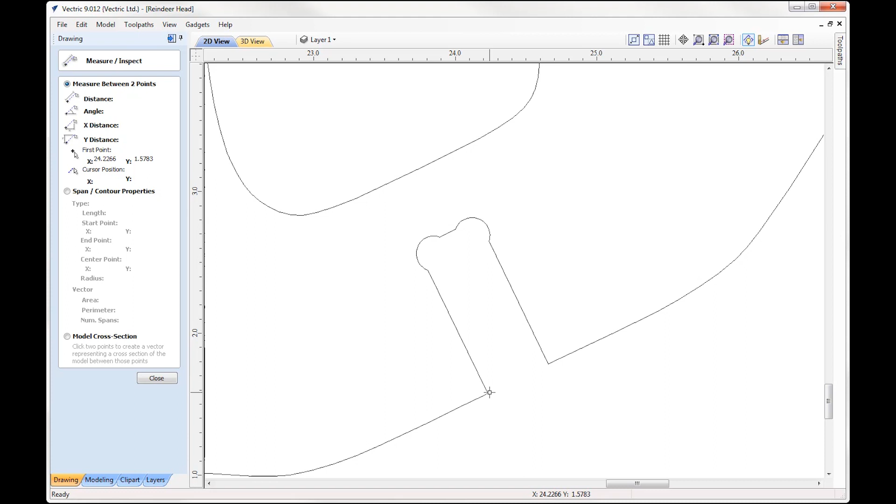If you're using a different thickness in material, then you must ensure that you alter all of the slot widths to accommodate that of the material thickness that you plan to use. So if we just measure this area here from end to end, you can see I have a distance of 0.475, which matches that of my material thickness. So make sure you alter the slots if you're working with different material.

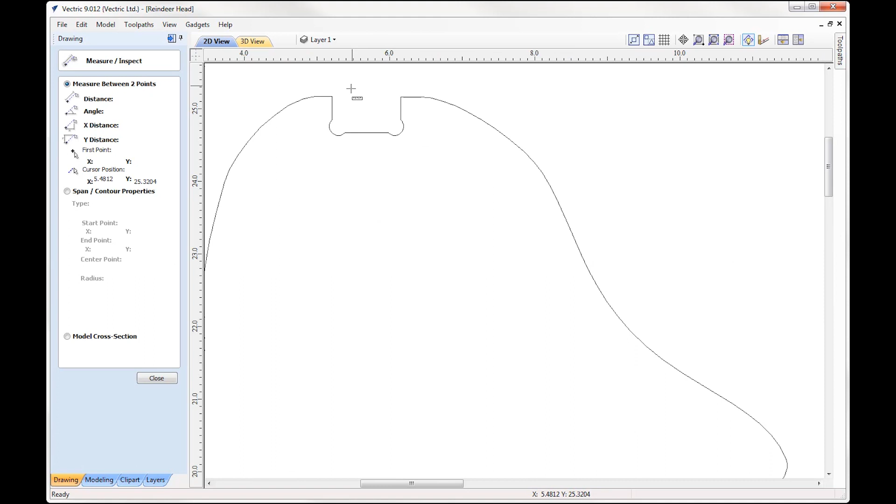Not only that, you also want to alter the fillets according to the radius of the tool that you plan to use. So how does the part fit together? Okay, so the antlers and the ears are going to slot into the head at the top there. So you'll notice that the slot for the head is actually double our material thickness, 0.95, because we're using 2 pieces that are going to slot in there.

And then the bottom of the neck of our reindeer head is actually going to slot into this slot here, which sits within the actual deer mount shield itself. You can see I've included some circles here on the actual mount itself, and these circles are in place for the washers just to provide extra support to pull the deer into the mount, as the deer will ultimately be very top heavy.

And then at the bottom left hand corner here we've got my test pieces, and as always with any slot together project you need to create some test slots to check the fit of the material within the slots themselves, and this little bit of extra cutout time will ultimately save us time and material in the long run, because we'll be able to get a correct match-up between the various allowances that will apply to each of these slots. Once we know which slot fits best, then we can apply that to our final part and just cut that out with no problems.

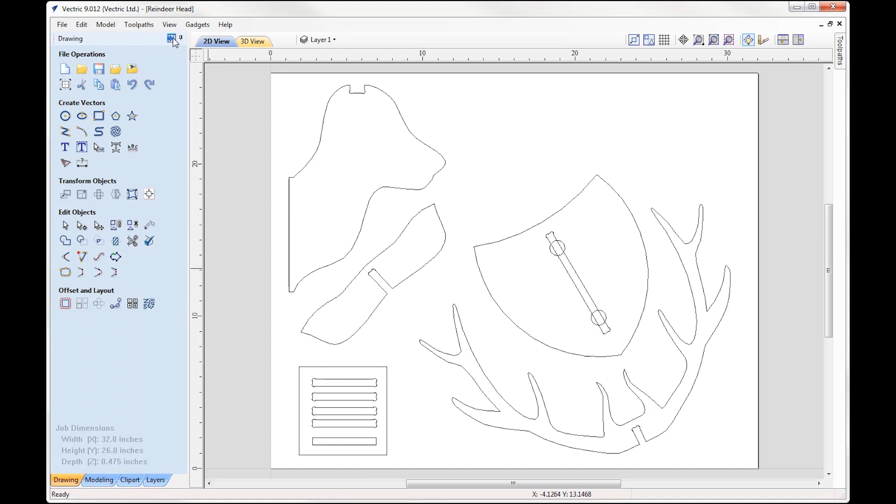So let's go and look at the toolpath. So I'll switch over to the toolpaths tab. So the first 5 toolpaths are all to do with our test pieces. So let's take a look at the first one as an example. So we'll just switch the visibility of that toolpath on. I'm also going to put the solid preview on, and we'll just zoom in on our test block there.

Okay, so if we double click to go in there, so we're just pocketing these slots out, and with each one of these I have a piece, a rectangle, that should sit within each one of those slots, and we're just ultimately checking for the perfect fit with each one of these slot holes to ensure that we have a real nice fit for our final part.

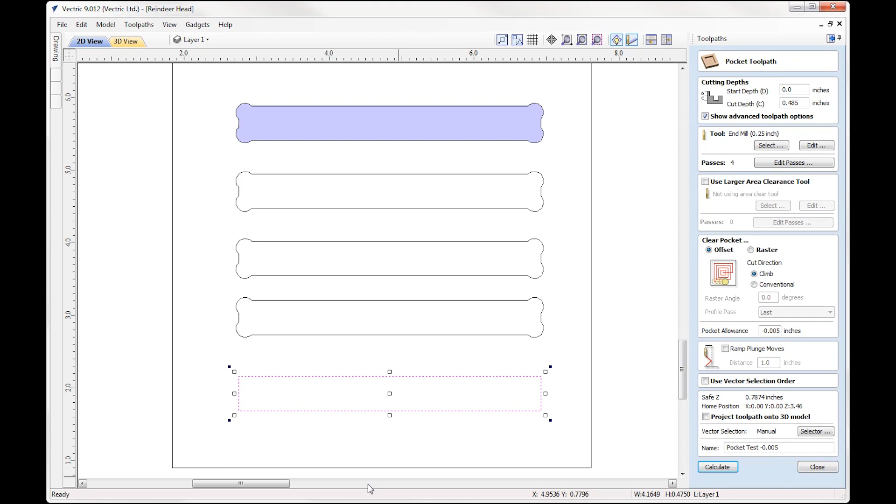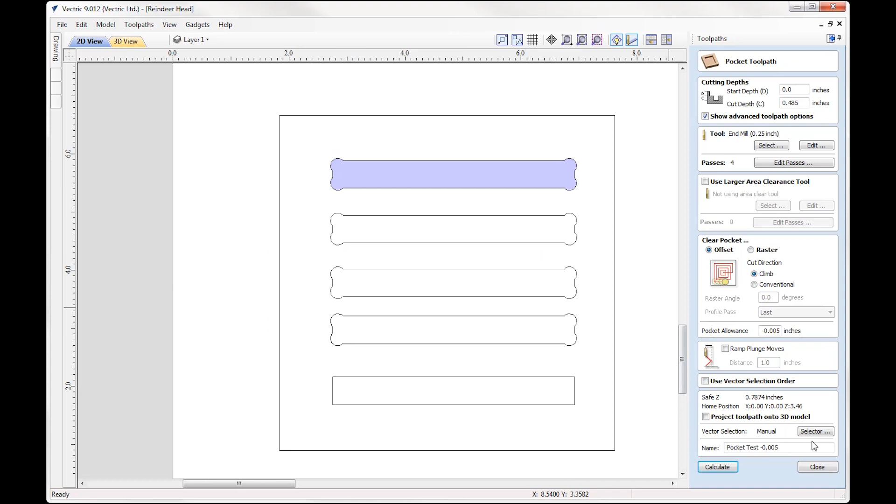So the first one that we've got here, we've got pocket allowance of -0.005, so we're just overcutting past the vector by that amount. So you can see anything that's purple is what will be cut away, and you can see it's overcutting the original vector there.

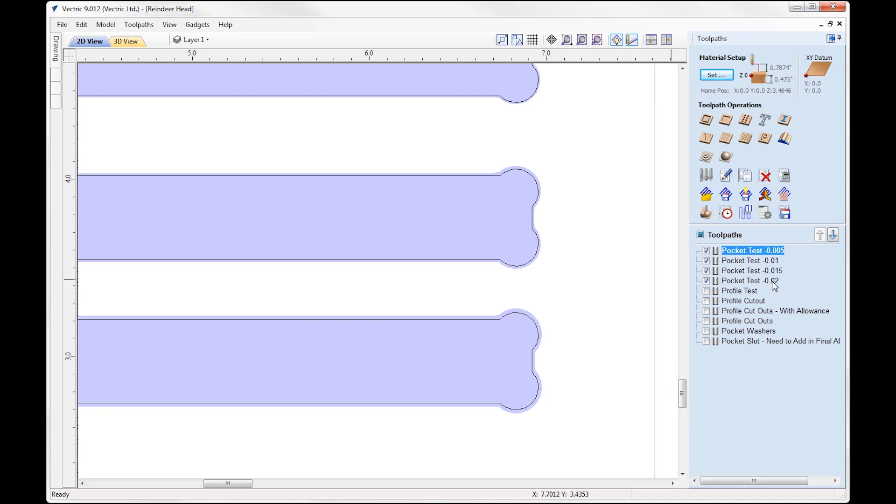Okay, if we take a look at pocket test 01 over here, so -0.01, and if we just zoom in there you can see we're just overcutting that a little bit more than what we did previously. And then for the 0.015 it's a little bit more, and then for the last one we've got 0.02, so you can see how we're just stepping that up each time.

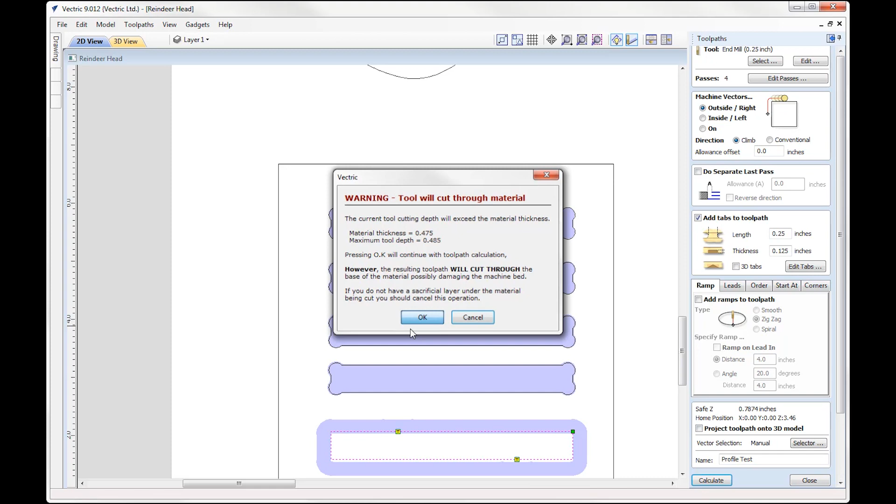Profile test, so that's to actually cut that out. Okay, so because I've moved that vector, let's just put that back in position somewhere around there, or we could just simply go ahead and double click on that just to recalculate that. So we're just cutting all the way through. We'll just tile the windows, and then again we'll just go ahead and look at that area.

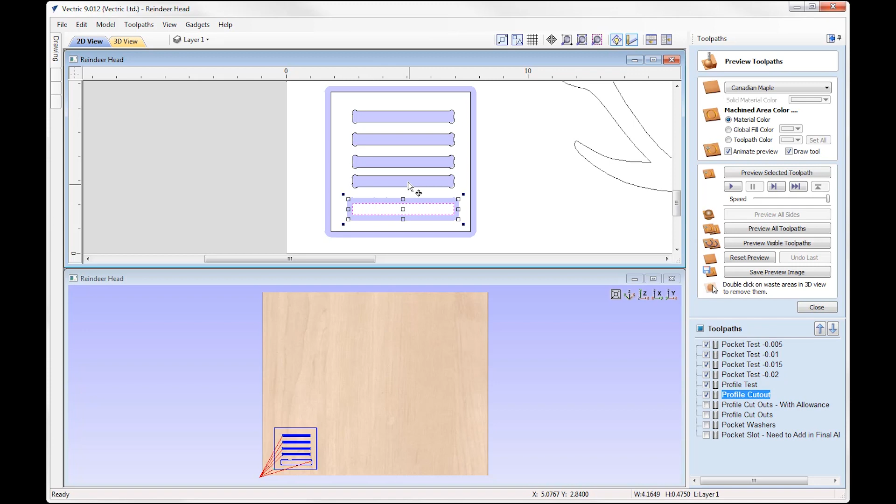So this is our part being cut out there, and once we've got that cut out, we're then just going to apply a cutout for this area, so we can take that off our machine bed, de-tab our test piece that we can then insert into each one of these slots to check which slot has the best fit for when we come to machine the overall part out.

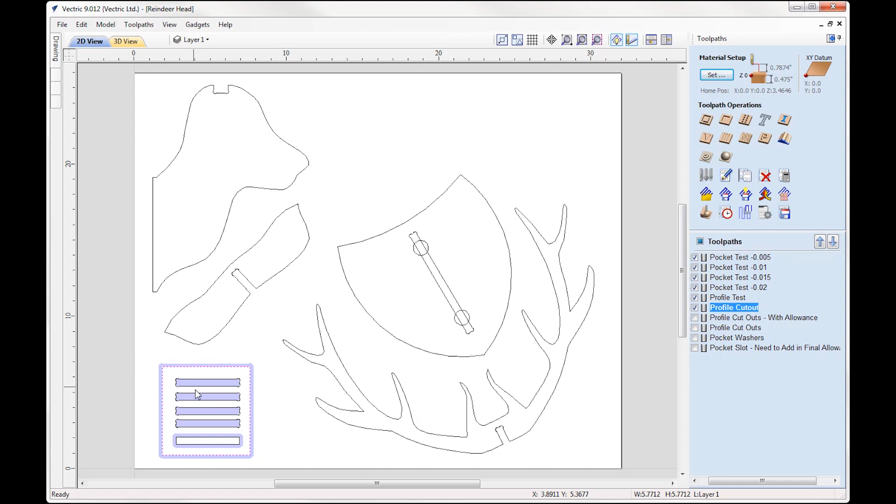So let's just maximise the 2D view, press F just to fit that to screen. We're just going to come out of the toolpath preview. And so once we know which allowance fit best, then we can apply that to our other cutouts. So we've got profile cutouts here, so this is for the antlers and for the ears.

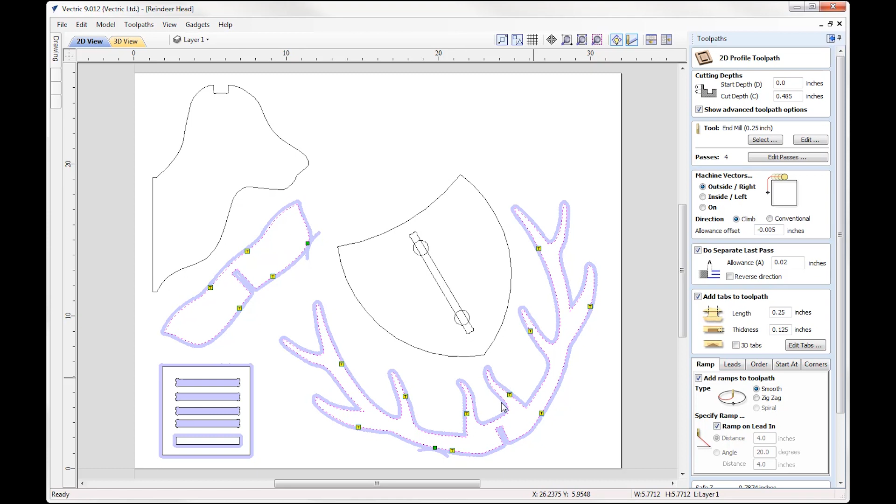So in here we've got an allowance, so if we go in there, it turned out that negative 0.005 is what fit best to go onto our deer head. Okay, so just alter this according to the slot that fit best. Okay, we'll just close out of there. So you see I added tabs to all of the antlers and the ears where I felt was appropriate, just to ensure that it was held securely to my material block.

Then we did some more profile cutouts. So here I've applied a cutout to the deer mount and the deer head. So this one has no form of negative allowance here.

We don't need to apply allowance. We only need to apply the allowance to the slotting together parts, which is just the ears and the antlers. So again, I've added tabs to this, along with some ramps and leads, just to bring that tool in.

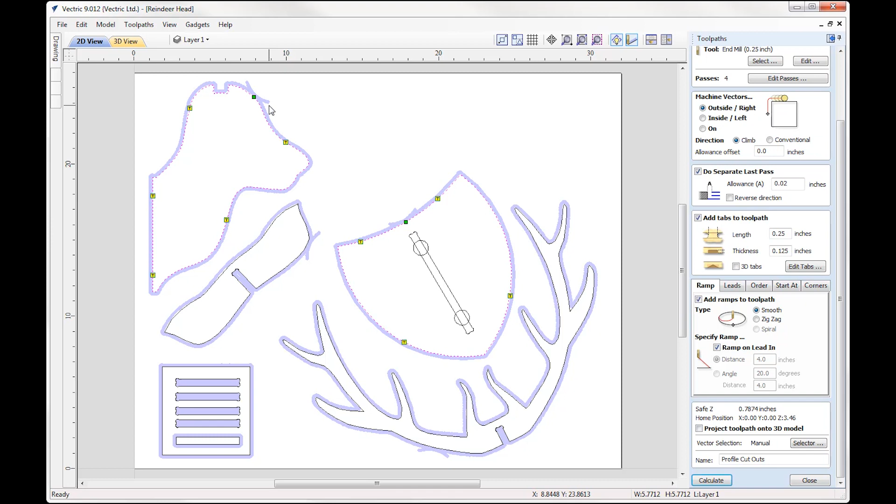Because I am using a compression cutter, we're just keeping that upward part of the tool away from the top surface, so bringing it down to a depth that ensures that we're going to be cutting down when we come close to the actual edge of the vector. Let's close out of there.

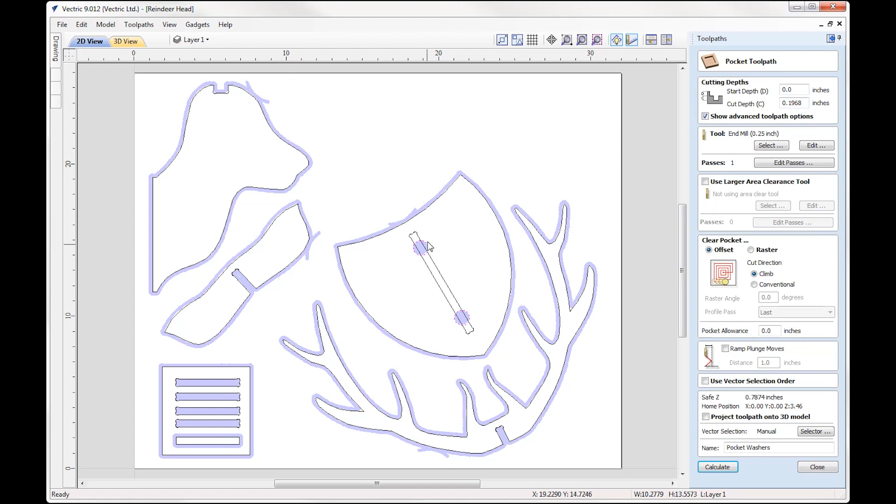So then I have my pocket for my washer. So if we just double click in there, cutting down partially into the material to put my washers within that pocket. So if we just tile our windows, and if we just begin to preview all the visible toolpaths, see how the part looks so far.

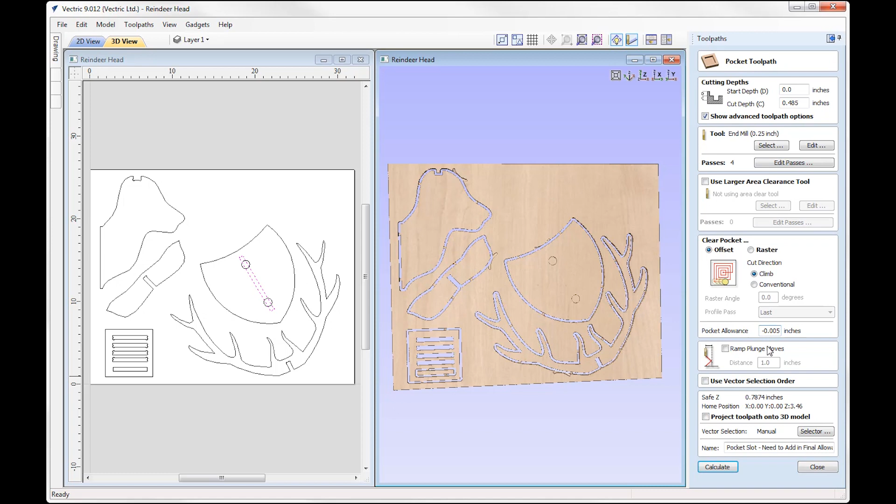You can see I've got my pockets there, and then for the final toolpath, that is our slot that's going to go through the center of our mount. And again, we need to add in that allowance that we were happy with. So in there, you just want to alter the pocket allowance. You can see I've entered that negative 0.005 in there, and then we can calculate that.

I'm going to cut through the material, that's okay, and then we'll just preview that toolpath, and this will be our finished part that we can then de-tab and then look at assembling.

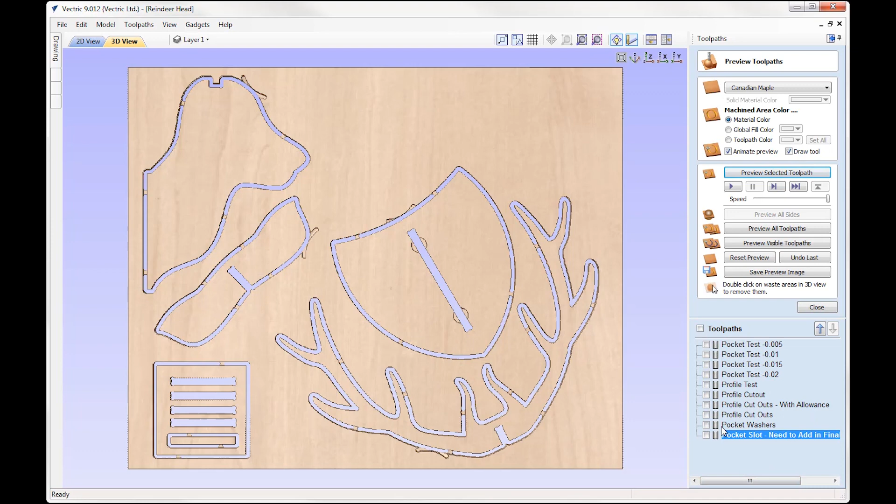So important things to remember here is you need to alter the slot width according to the material thickness that you're using, and with that you want to make sure that you alter the fillet radius according to the tool that you're using, and I'm using a 1/4 inch end mill for all of my toolpaths.

So with any slot together project, we must always do our test cut. So I've cut the test part of the file out. I've got my rectangle here, so this is going to represent anything that's going to slot into one of the slots, and then I have a series of slots here like you saw in the software.

So we've got negative 0.005, we've got negative 0.01, and then we're going up to negative 0.015, followed by negative 0.02. So it's always best to start with the larger allowance first and then work your way to the tightest fit. So I've got my part side on, and you can see straight away that is just sliding through there. So that's going to be pretty useless to us.

So let's try the negative 0.015. Again, that is just sliding through there, not very practical. Let's try negative 0.01. Okay, so here it's not too bad. That's a nice fit, however it is a little bit loose. You can see that jiggling around in there.

So let's go to our trusty negative 0.005 to see how that fits. And you can see we've got a real nice tight fit in there. Struggling just to push it out, but it does come out. So we're going to go and alter the file so that all of our profile passes have that allowance of negative 0.005.

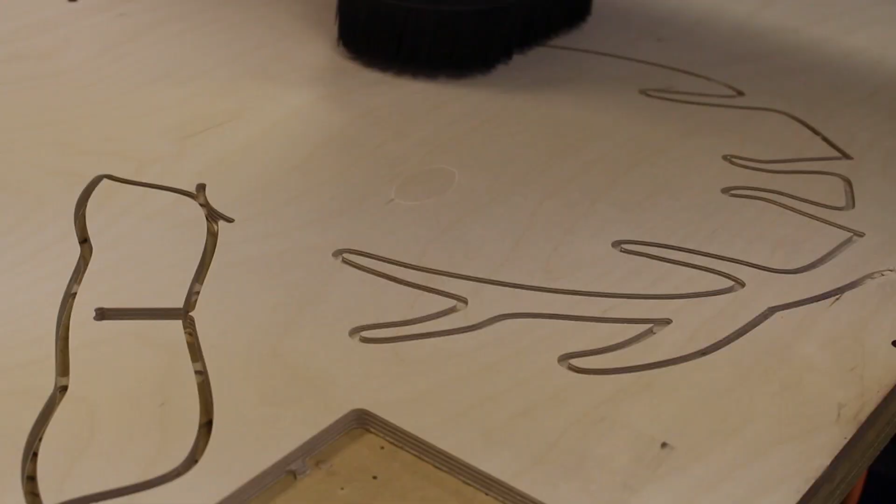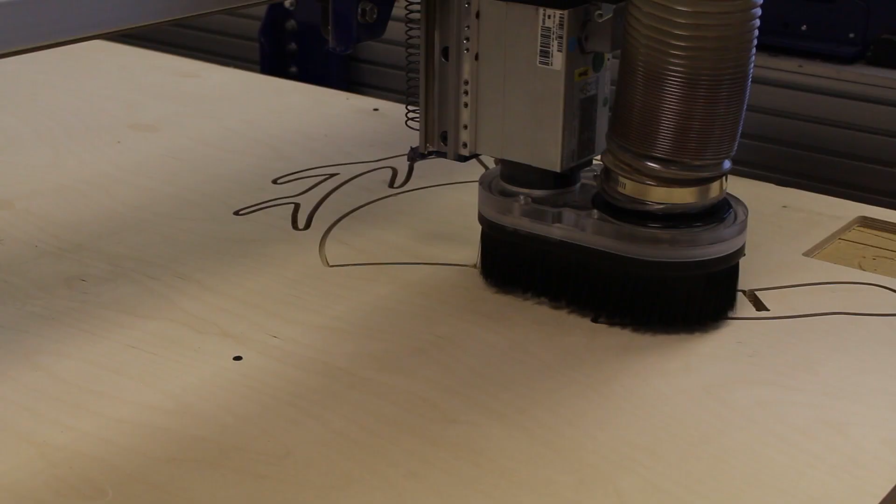Okay, so we've got all of my parts fresh off the machine. I've gone round, I've detabbed everything, given it a nice sand so we've got a nice smooth edge for all the parts that form the reindeer head. So here we have the antlers, and then with the antlers we've got these ears. The two are going to come together something like this. So they're going to sit together here like so.

And then both of these parts are going to slot into the top of our reindeer head at the top here. The bottom of our reindeer head, or the neck of the reindeer head, is going to slot into the shield or the deer mount part of our reindeer head.

And then on the back of our deer mount, you can see I have two circles, one at the top, one at the bottom. These have just been pocketed down just so I can put some washers in to screw into the actual deer head part, just to pull it all in for extra measure so that the part doesn't fall out. So let's assemble the parts together.

Okay, so I've secured the head of the deer to the deer mount using screws and washers in the back there. All we need to do now is put the ears in. So we're going to put the ears in at the top towards the back, followed by the antlers. They're going to go and sit in at the front.